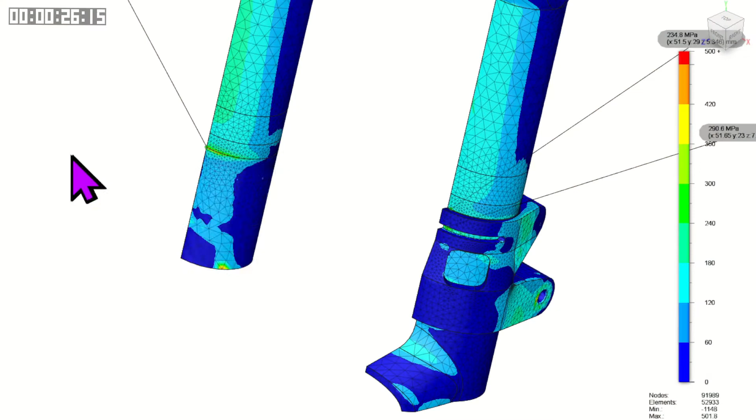My new gravel bike frame set was supplied with a clamp that looked like this. For good engineering reasons, I decided to replace it with a clamp that looked like this. And in an earlier video, that's linked in the top right, I carried out a stress analysis to investigate my engineering intuition. My analysis suggested that the alternative clamp would be better, but perhaps not for the reasons I first thought. However, the clamp that you can see here has some other issues.

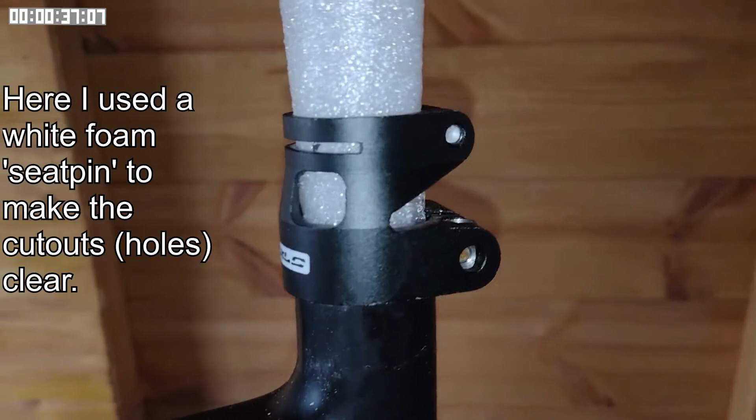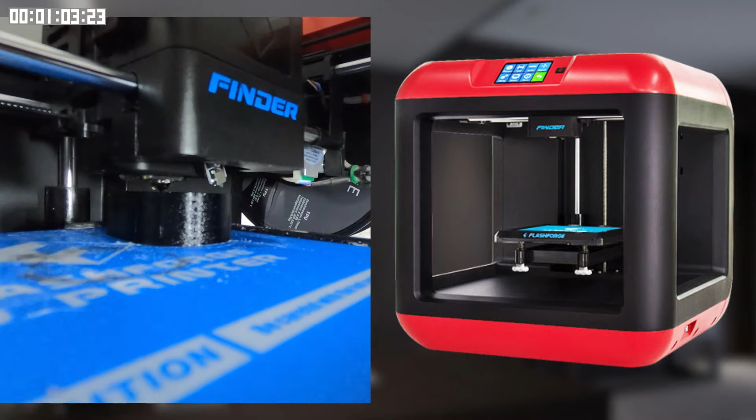For instance, it has these holes in it which could allow water and dirt to enter, and because of the design, it would be particularly difficult to clean in there. So any mud or gravel that found its way in there would probably stay in there. Not ideal. Now, the old me probably would have put some tape over those holes, but as you saw in the last video, I'm a proud owner of a 3D printer. So I decided to use my 3D printer to make a cover to go over the seat clamp. This video will show you how I went about making it, and of course show you the final cover.

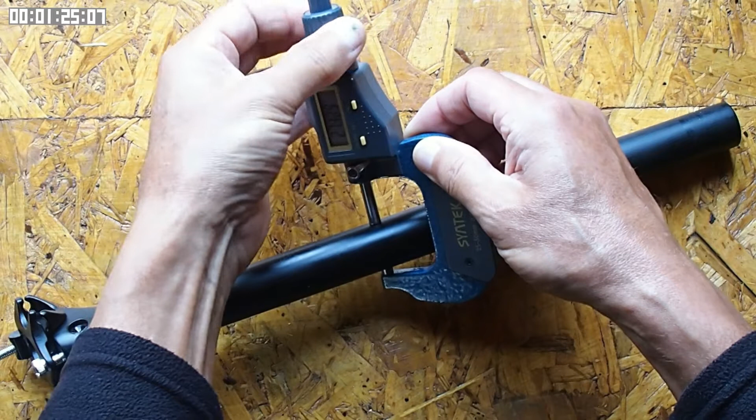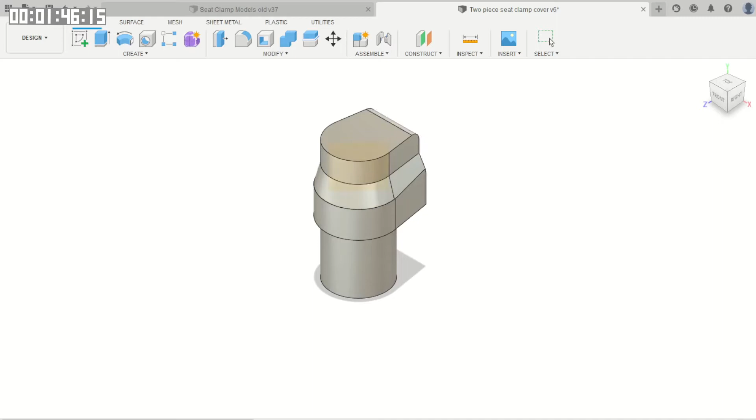Obviously, the cover had to fit properly, so I measured the various components. Here I'm measuring the seat pin. As you might guess, I had already made these measurements in order to put into my stress analysis models. So my starting point were the CAD models associated with the finite element models. This is the model of that alternative double seat clamp. My next job was to simplify that model so I could use it to build a former around which I could construct the seat clamp cover.

Here I'm replaying how I built the CAD model of the seat clamp cover. As you can see, it's in two parts. I then converted the CAD model into STL files and transferred them over to my 3D printer software. And from there I could send it to my 3D printer. This is a short video of one of the parts printing.

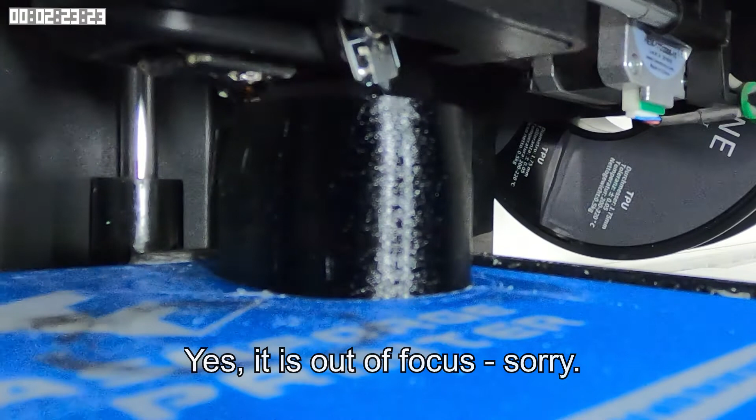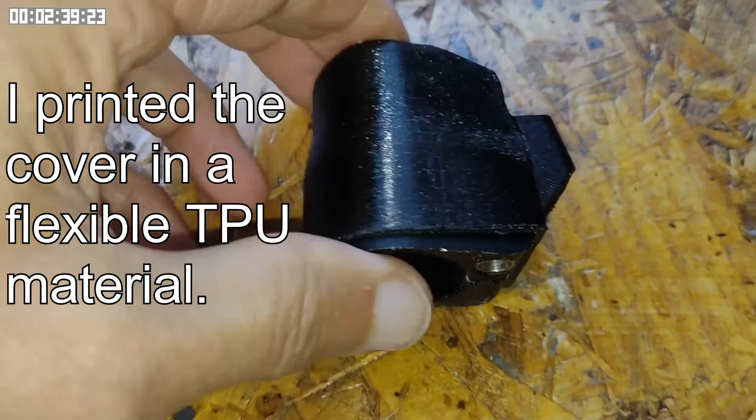This is the double seat clamp off of the bike, and this is a trial print of the cover, which, as you can see, fits over the clamp. And here is the bottom part of the cover. After testing the trial printed cover, I made a few small adjustments. I then reprinted the cover in the high quality mode. And here is that high quality print installed on the frame.

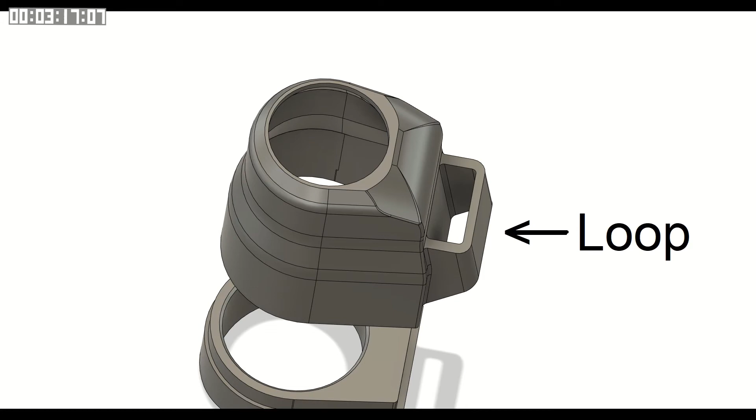At this point, I must admit, it could look a bit more elegant, but I'm more concerned about its functionality. Talking of functionality, as you can see on the back, there's a loop. I incorporated this extra loop so I could put an LED light on there. Overall, I must admit, I'm quite happy with this cover. It should do the job. That doesn't stop me thinking though, what would the next version look like, and how could I improve it?

Of course, you wouldn't normally look at it close up like that, so let's stand back and see what it looks like. I'll leave you to decide what you think of it.